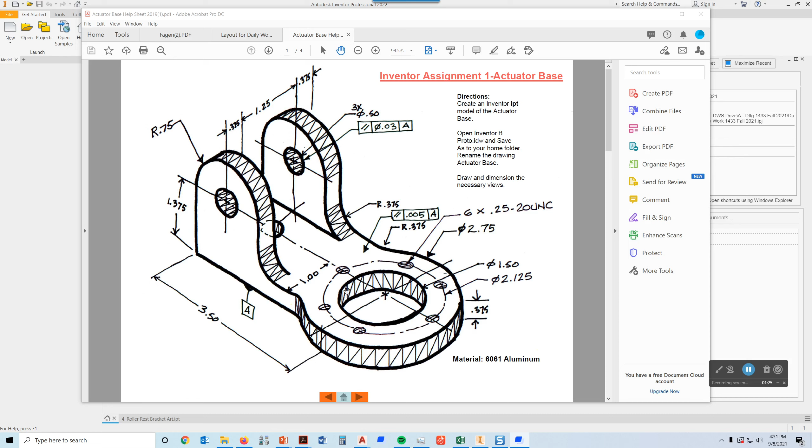Once we get that done, we'll extrude it, and then we'll add the other detail to it. All right, so let's get started.

I'm going to double click on part, and that's going to open this up. We always start by using project geometry and project the YZ and the XZ plane.

I'm going to use the intersection where those two lines cross, and that's where I'm going to draw the 2 circles that I need. So I'm going to use the circle command. I want to snap to that point right there, and I'm going to type...

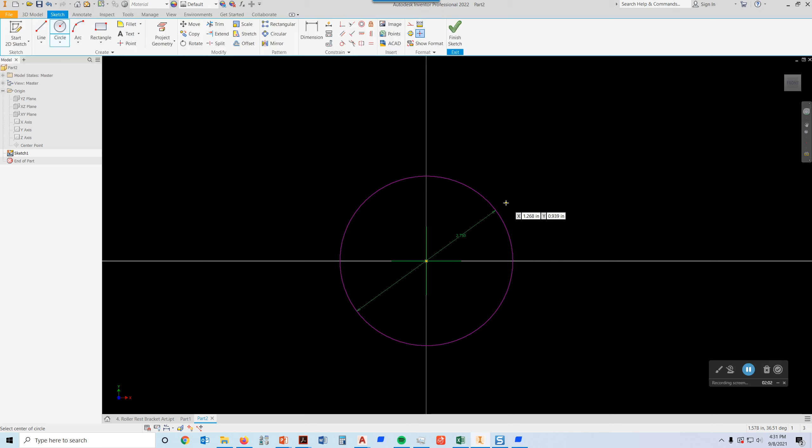2.75 and press enter, because that's my first diameter. I need another diameter. I'm going to snap right there, and this one I want to be 1.5 and press enter.

All right, and to add that other piece, I'm going to come out somewhere in here. Maybe I'll just start in here, and I'm just going to draw a rectangle, and I'm not going to worry too much about the size of the rectangle right now.

I'm going to use the dimension, and I'm going to dimension from this axis here to the back of that and pick, and I want that to be 3.5 and press enter.

If that pulls too far back and it pulls the front edge off of your part, you can actually, by pressing escape, just drag on that, and you can drag this back in here. So from this axis here to the back edge, I want that to be 3.5.

I'm going to add another dimension in there from this edge here to this axis, and I want that to be 1 and press enter. And I want it to be 1 from this edge to that axis right there, because this is a symmetrical part, and I want that to be 1.

You want to make sure that your rectangle still goes inside that larger circle, like this one does right there. And as I said, you can even drag that if you want. You have to press escape, get out of the dimension, but just drag that in a little bit if you need to.

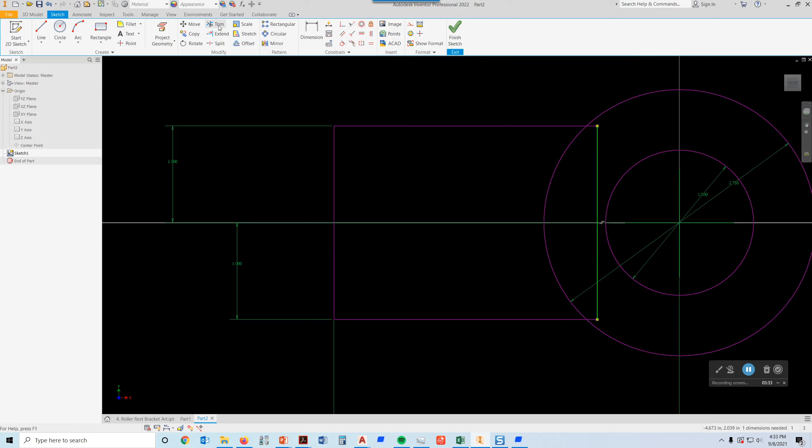At that point, you could use your trim command, so you can pick up here for trim, and you can delete some of this stuff out that you have right here. And that's generally the shape of the base.

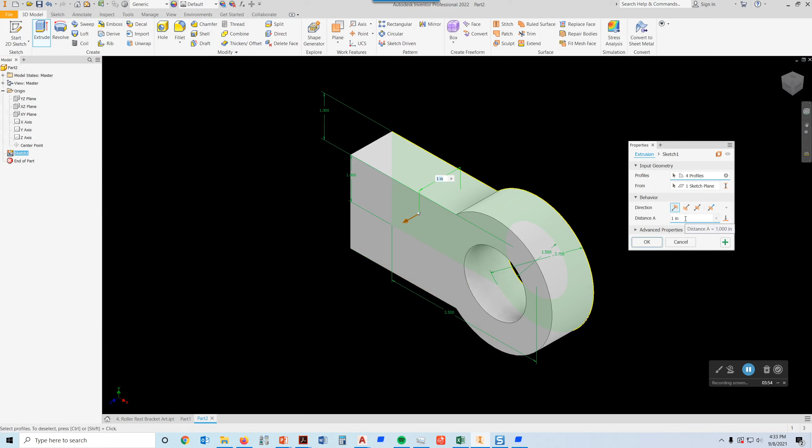So what I would do is finish the sketch and use the extrude command, and you'll have to make sure you get all the quadrants of that. And the height of that extrusion is 0.375, and press enter like that.

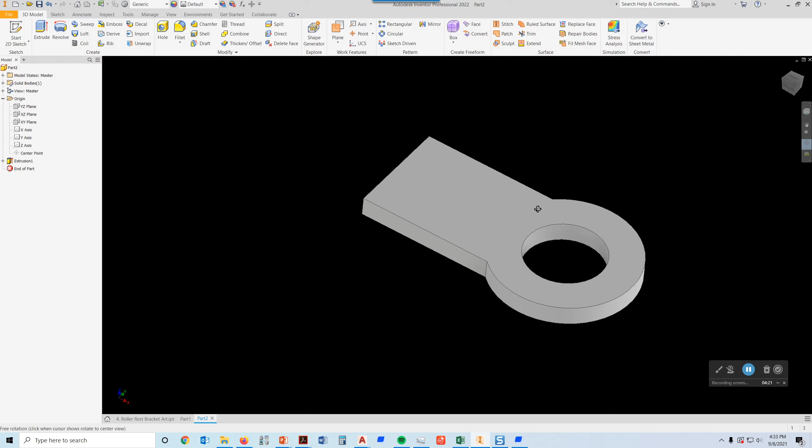Now, I would like for this to be sitting on the base, and so a good way to do that is to go over to my orbit tool right over here and pick on that, and then come inside this circle and kind of drag things around, using the pick button on your mouse, until you get it about like what you like, something like that's what we want.

And then what you're going to do is go to your view cube, and you see this corner right here, the corner pointing at you. If I pick on that, it's going to take what I have here and move it to where it's a true isometric, like that.

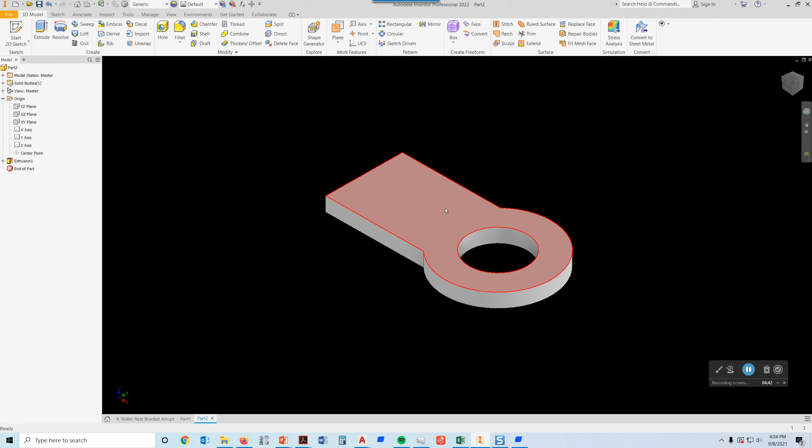Okay, now I can press escape. So I have my object at an isometric, but that is not my home view, and I want this to be my home view, that orientation.

Move your mouse over onto the view cube and right-click, then go to Set Current View as Home, and pick Fit to View. That now will be your home view, which is what we would like to have.

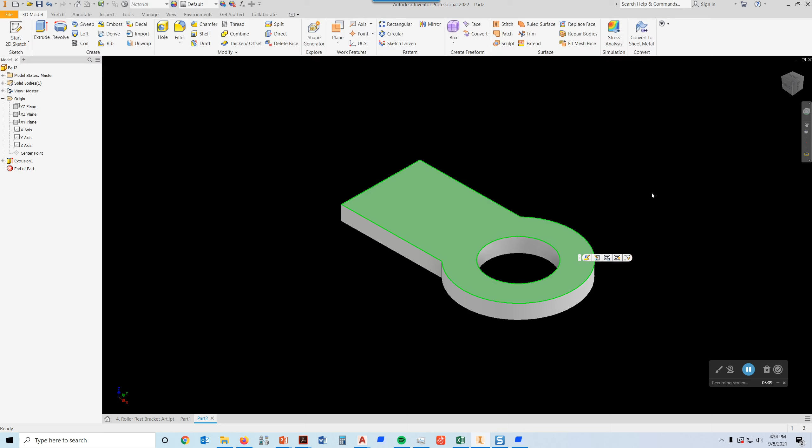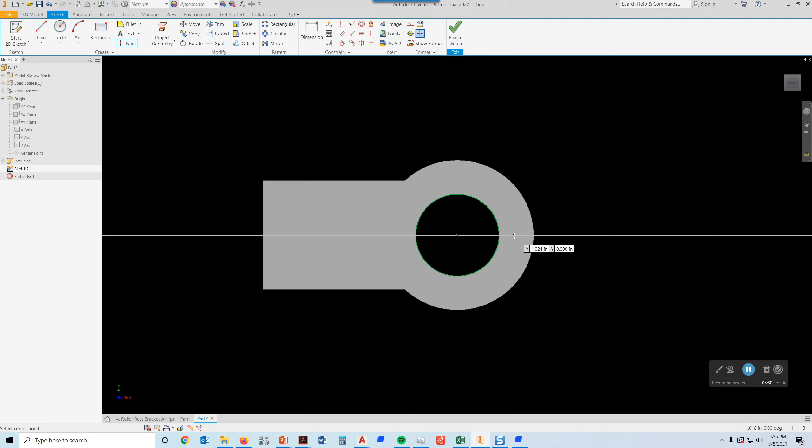Now I'm going to pick on this plane and pick New Sketch, and use my Point Center Point tool. I want to get lined up right on this center point. If you move your cursor onto that, Inventor will grab that point and follow right along there, then just pick like that.

So I'm going to place a point center point on there, and now I'm going to use a dimension, dimensioning from here to this center point, just like that, and pick.

Now, if I want to project some geometry in there, let me cancel that for a second. If I pick Project Geometry and go over here, you can see that I could project that into there, and project that in there, and then I have my green geometry that I can dimension to.

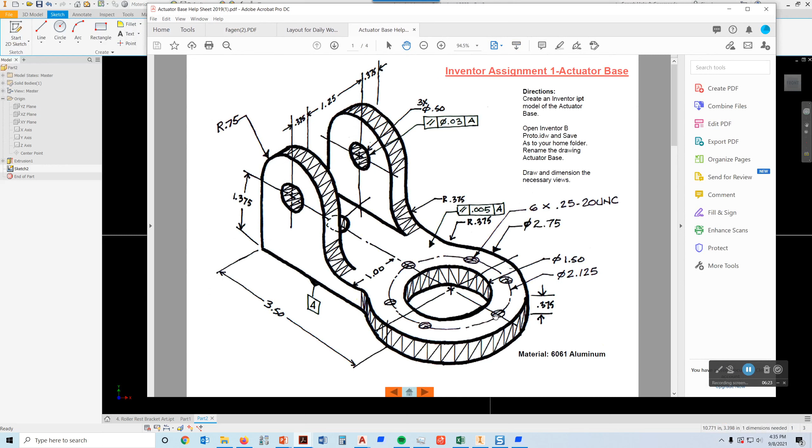I'm going to double click on this distance right here, but before I do that, I want to show you what I'm up to. You see this diameter 2.125? That is the diameter of this bolt pattern. So if I measure from this center to there, that would be half of that, so that's the dimension that I want.

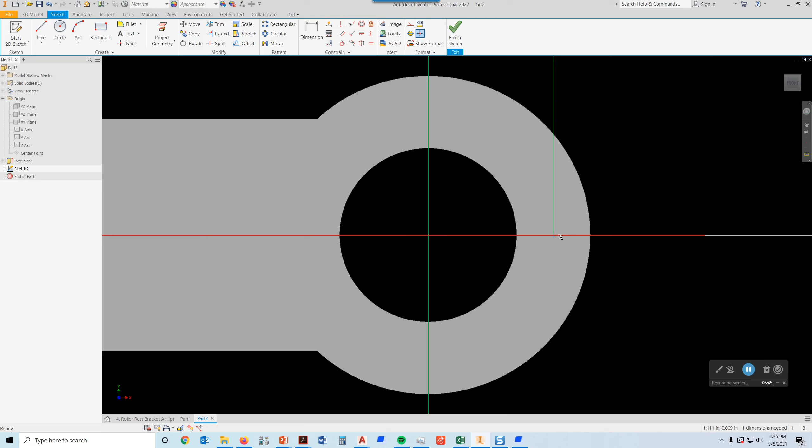So I'm going to double click right here and type 2.125 divided by 2, and press enter. That places that right where I want it. Remember, I went right down this center line, so I know I'm on that. If I were off that center line, I could put a dimension in from the point center point to this center line and bring that back to 0 so they're directly on the line.

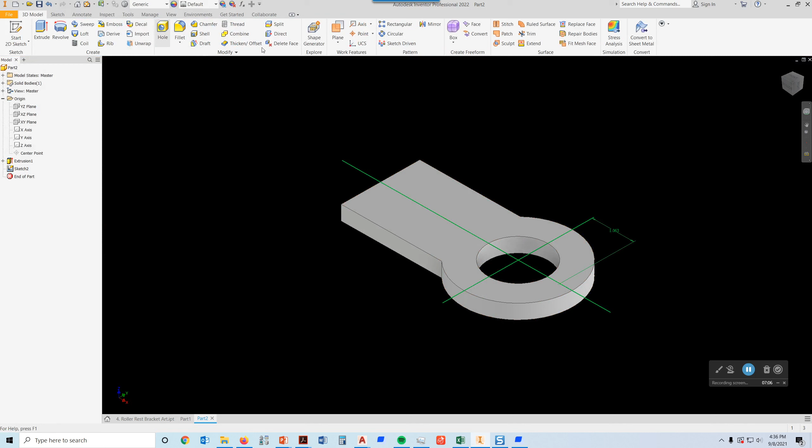But at that point, I'm finished with the sketch. So because I've placed a point center point there, I can go to the hole tool. This time I want a tapped hole, so I'm going to pick on that. I don't want a seat on it, but I do want it to be threaded.

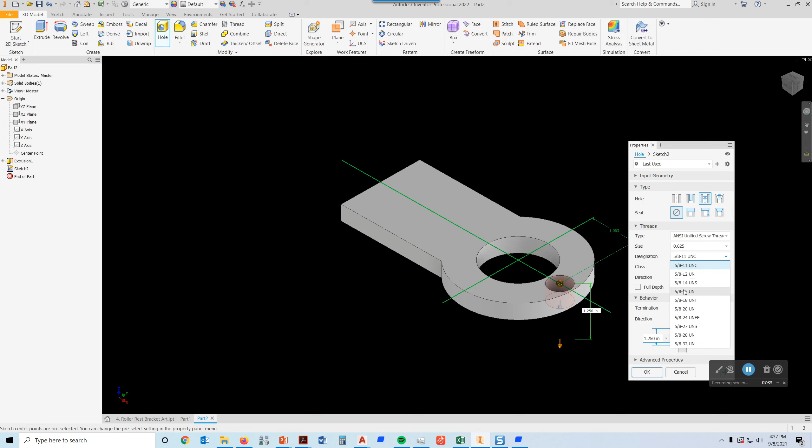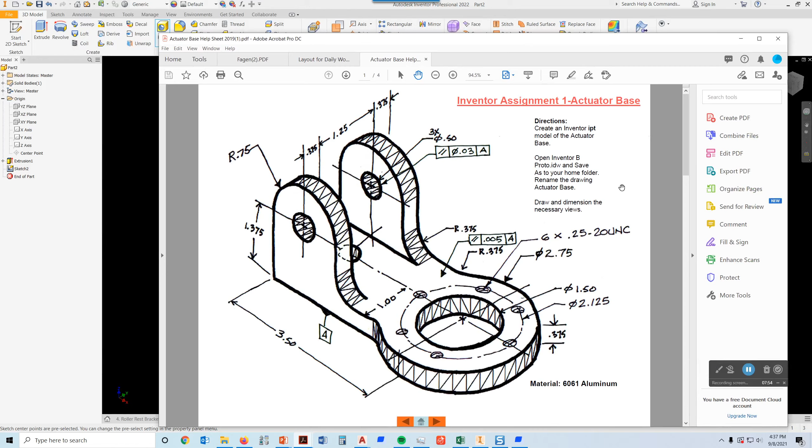The size of it is 0.25. I need to pick the thread that I want, changing that to 0.25 - come on, 0.25, where are you? There it is, 0.25. Looking at this note here, it says 6 times 0.25, which can be 1/4, or 0.25 dash 20 Unified National Coarse. That's the thread type that I have, so I've got 1/4 dash 20 UNC.

I can leave this at 2B. The depth I want is through all, so that should go... that is 0.375, so actually I don't know why it's giving me this. Let me go to Select Surface, I could pick the bottom, that would go to 0.75. So through all ought to be good.

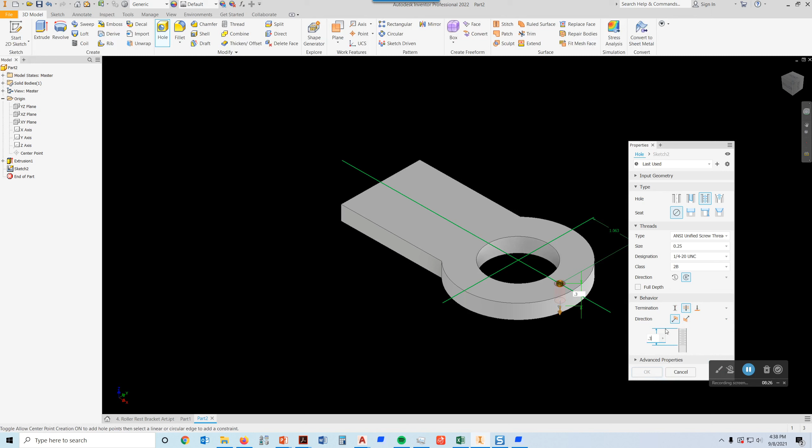That ought to just take it right through there. I don't know why it's overriding with this. I could go ahead and put that in as 0.375 and override that if I need to, and pick OK.

And if I go to my top view and look at that, that's where I want that guy to be. So then I'm going to pick like that, and you can see it's threaded - you can see some thread in there.

Okay, so the next thing I want to do is use a pattern, which we haven't done before. I'm going to choose a circular pattern, and it says to select the features - you can see that's selected blue. So I'm going to pick this guy right here, or I could go over here and pick on the hole in the tree. Either place works.

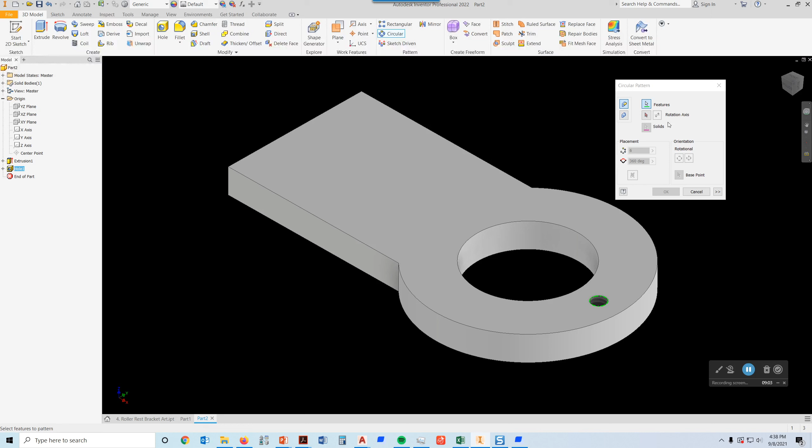Then it says rotation axis, and I have to pick on this button right here. I can choose either the inside of this circle, that hole there, or this outside circle for my rotation axis, because those are concentric. So let's say I pick this one - it's going to pick right there in the middle.

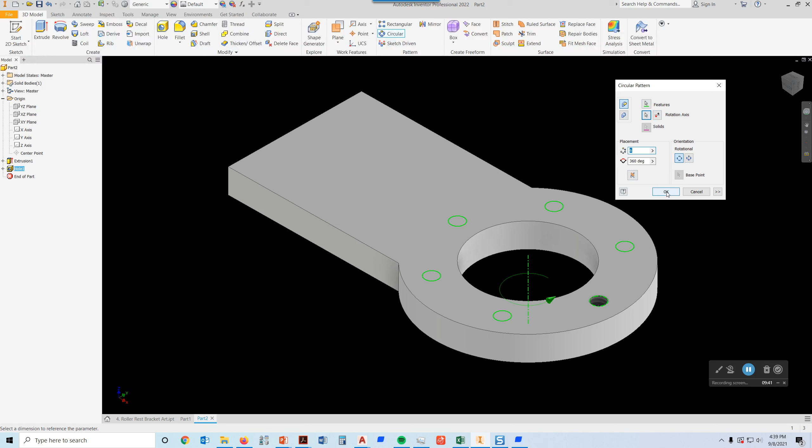And then it asks how many holes do you want, so I'm going to type 6. This is similar to the polar array in AutoCAD, so 6 instances of that hole. I want it to fill a full 360 degrees, and everything else looks good, so I'm just going to pick OK, and that builds that guy right there.

Next thing I want to do is add these 2 tabs that stick up here on the side, and the height of those tabs is 1.375 plus this radius right here. So that's 1.375 plus 0.75.

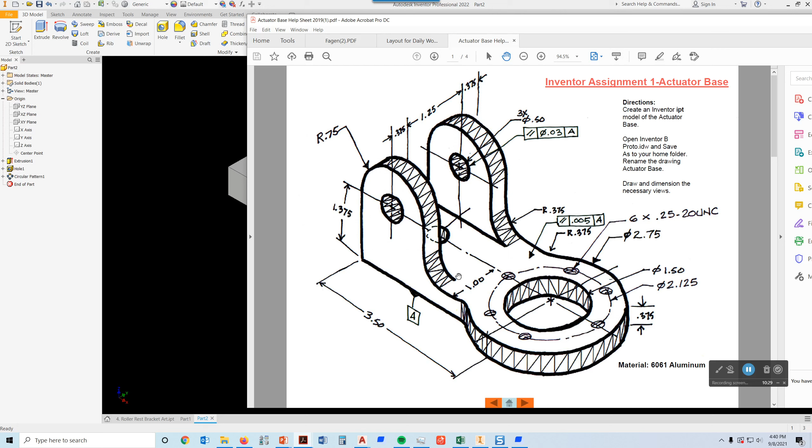But if I build them from on top of this right here, then I also have to subtract the height of the extrusion, which is 0.375. So from this surface here to the center of that hole would be 1 if we subtract 0.375. And then we have a radius of 0.75, so the height from the top of this surface here would be 1 plus 0.75. That's how I'm going to build those.

I'm going to start a new sketch on this surface here, and draw a rectangle, starting at that corner and going in this direction. The radius of that is 0.75, so if I double that to get the full width, that's 1.5. So I'm going to type 1.5, tab, and the thickness of that is 0.375, like that, and then I'm going to enter.

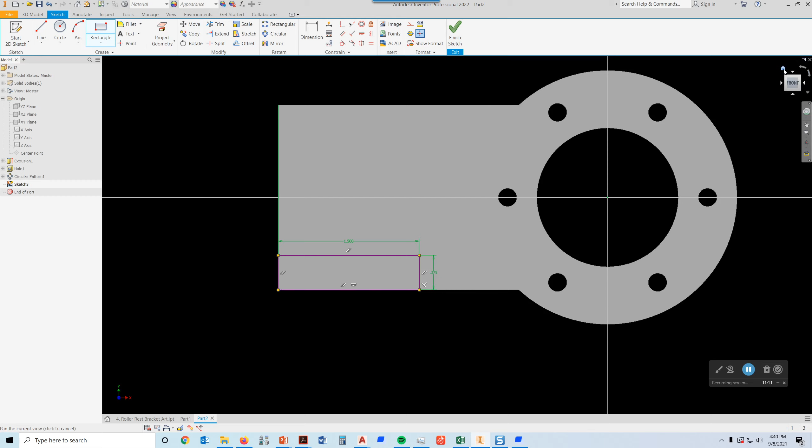I'm going to go back to my home view, and finish the sketch so you can see what that looks like.

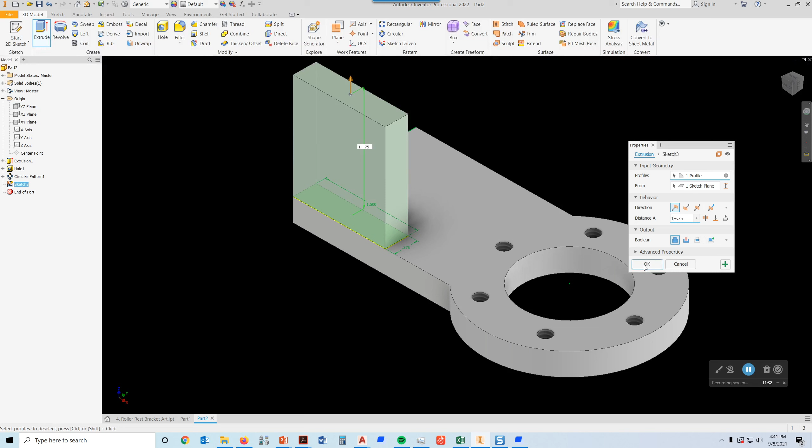I'm going to extrude that by picking right there, and the height of the extrusion is going to be 1 plus 0.75. Or I could have just typed 1.75 since I knew mathematically that's what it was, and choose OK.

So now I have the basic of that tab that sticks up right in there. Let me drag this over, and imagine that this is just squared off.

So what I'm going to use now is the fillet command with a radius of 0.75 to round that. Then I'm going to add this hole, add this fillet right down here, and add this fillet over here, and then mirror all of that over to the back side.

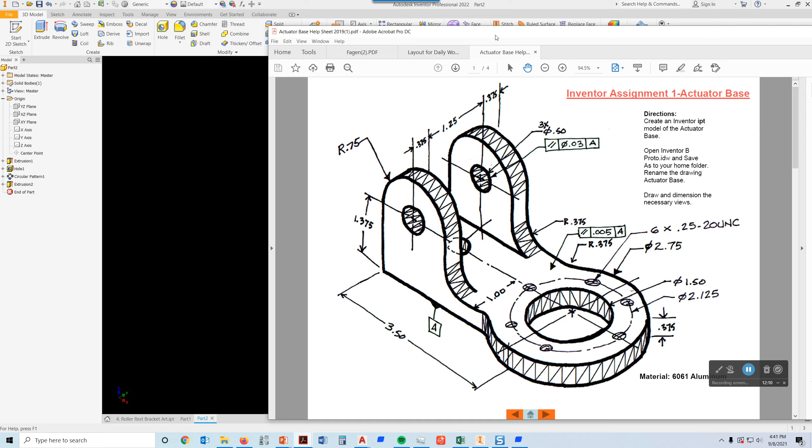The first thing I want to do is go to my fillet command and set that to 0.75 and press enter. Then I'm going to pick on this corner right there, and pick on the back corner right there, and choose OK, because that fillet is 0.75.

Now I have another fillet right down in here that should be 0.375, and this fillet over here should be 0.375. So I'm going to go to the fillet command again, type 0.375 and press enter. This time I'm going to pick right there in that corner, and pick right here in this corner, and pick OK.

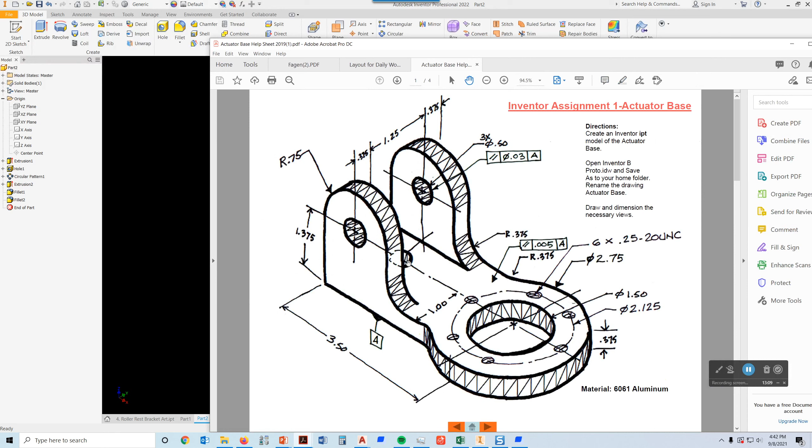Now the other thing I need to do is put in a hole, and that hole has a diameter of 0.5. This is a 0.5 and this is a 0.5. It says 3 times, so there's actually another hole right down here that's 0.5. So I'm going to put this guy in first and then mirror it over to this side when I'm ready.

So I'm going to pick on the hole command, and pick on this surface right there, then come pick on this arc. When I pick on that arc, it centers the hole inside that. This is a simple hole with a diameter of 0.5, and it goes through all, so that would put it through to the next side, and pick OK like that.

Now I need another hole right down here on this before I mirror all this. I guess I could put that in, but let's just go ahead and do a hole. I'm just going to pick right down in there, and the distance for that hole would be from the back edge to the center of that hole. Let me see here what I want to do. I want to go from, oh hang on, let me undo.

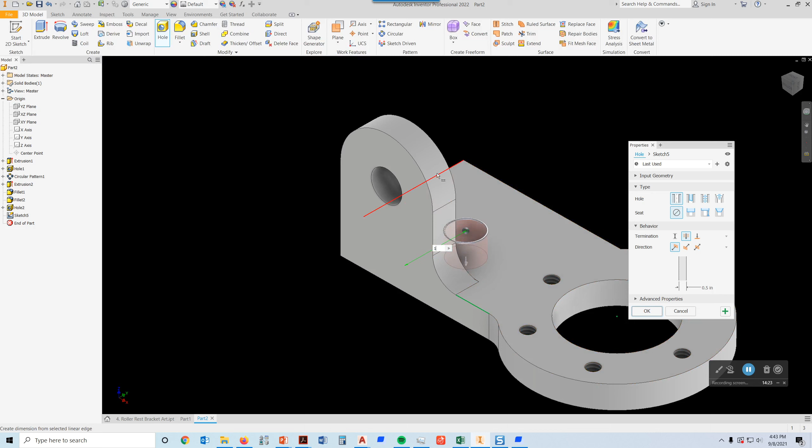What I wanted to do is place that hole, and then do some dimensions for it. I'm going to pick on this edge, and this dimension should be 1. Then I'll pick on that edge, and this distance should be 0.75, which will move that. Then the diameter is 0.5, and it's a through hole. So I'll pick OK.

That places that guy, and if I go up here and pick on front or top, I can see what that looks like. That should be centered right here, in line with these other guys. Now I'm going to go back to my home view.

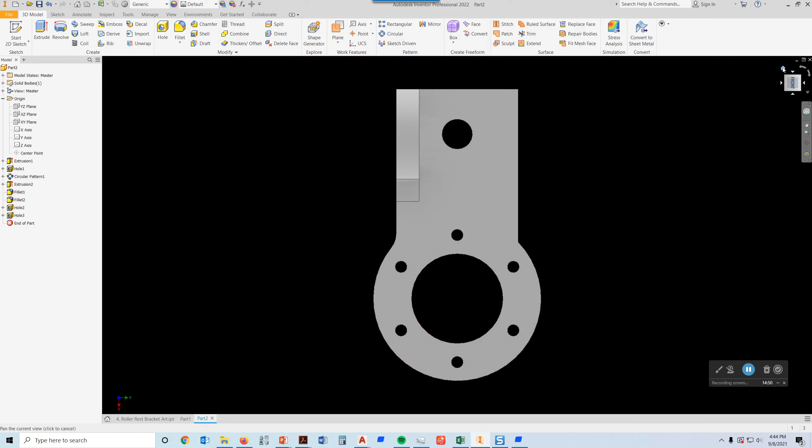Okay, it's time to use the mirror command. In order to do a mirror, remember you have to have a work plane that you're going to mirror around or about. So I want a work plane that's halfway from this edge to the back plane over here on the other side.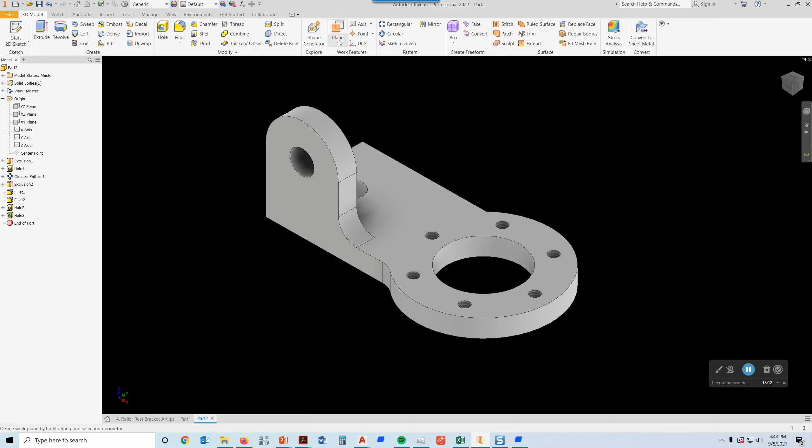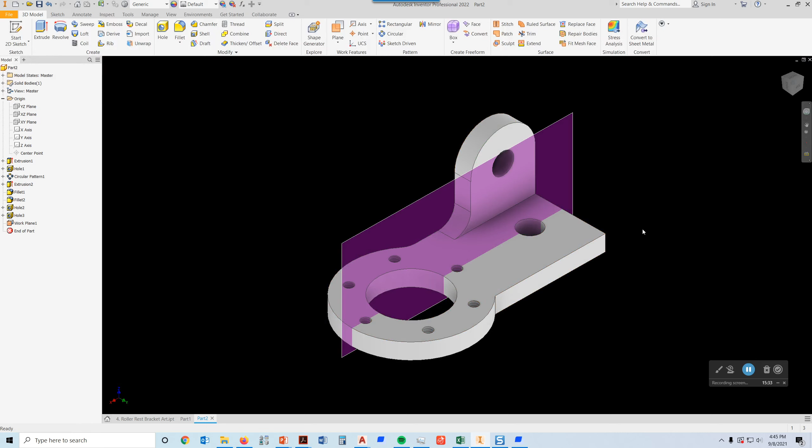I'm going to go to plane, pick on the down arrow right there, and say mid plane between two planes. I'm going to pick on this edge here, and then I need the back edge over here. If I have trouble getting that, I'll go to my view cube, spin it around, and pick right there. So I was able to select both planes, and now I'm going back to my home view.

So now I have a work plane exactly halfway through the middle of my part. Okay, so now I'm ready to do mirror. I pick on the mirror and it says select features.

So what I can do is come in here and choose this extrusion right there, and choose that fillet right there. I can choose fillet number 2, which is right there. I can choose that hole, okay? I don't want to choose this third hole, because that's the hole in the center right there. So I'm going to make a mirror of the extrusion, the fillets, and this hole that goes through. You can see that features is selected.

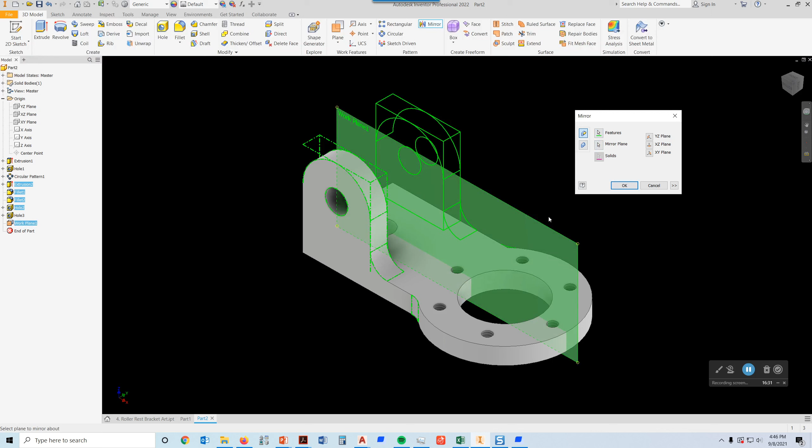So I'm going to go to mirror plane and pick on that button, then go to the edge right here and pick. You can see it's showing me everything it's going to mirror. So I'm going to pick OK, and all of that is mirrored.

Now, if I spin this around, because I asked it to fillet this guy right here, that should be filleted. Let's see if it looks filleted. For some reason, that doesn't quite look like it mirrored that fillet. Let's see, where is that fillet over here? I see fillet 1 and 2. For some reason, it did not pick up on that fillet.

So what I'm going to do is just use the fillet command. I've got 0.375, and I'm just going to pick in that corner right there. I don't know what happened—for some reason I didn't get that selected when it mirrored over to the other side, but I can still fix it by adding it right here.

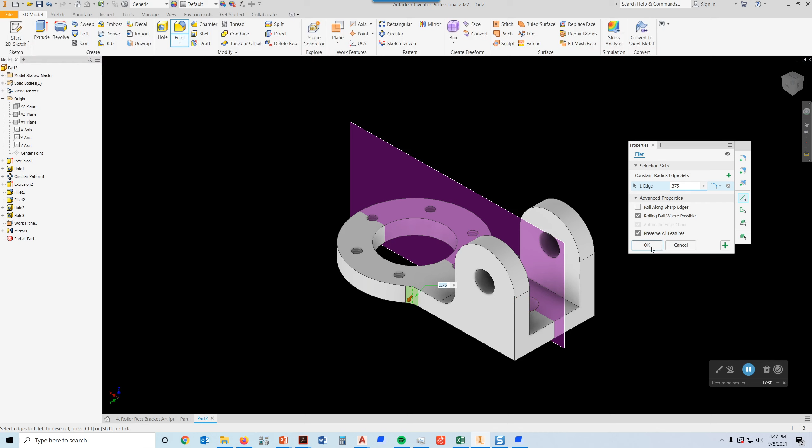The downside of doing that is it's going to create another fillet in my tree, and I would have rather had that fillet be a part of all these others. But I could go back and redo that one if I want to. I'm just going to pick OK, and that puts that in there. Then I'm going to go to the home view.

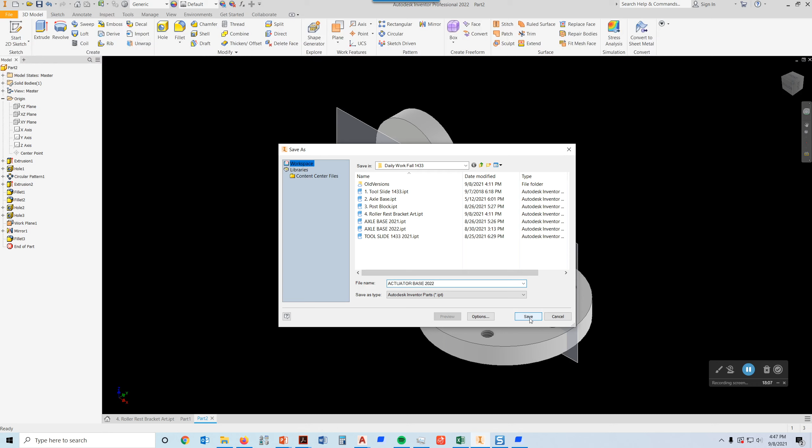All right, so are we missing anything else? It looks to me like we have everything that we need in our part. So at this point, I would want to come up here and do a file, save as, and save this as Actuator base. I'm going to call mine 2022 because I'm using Inventor 2022, and just pick save.

All right, so at that point I have this guy modeled, and I'm not going to tie you guys up any longer with this video, but I'm actually going to go in and fix that fillet that did not mirror over. I don't know why it didn't, but I'm going to fix that before I save all this stuff. Anyway, that's how you'll model this part.